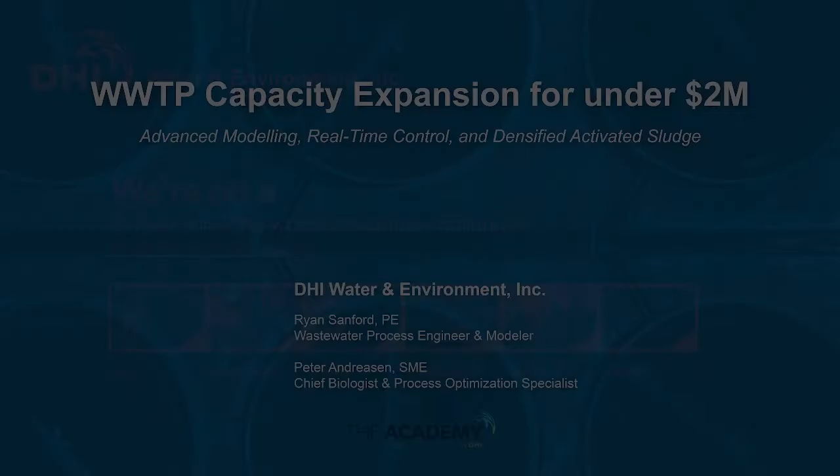My name is Ryan. I'm a process engineer. I work for DHI Water & Environment, Inc. DHI was originally Danish Hydraulic Institute, so it's a hydraulic modeling company for the most part. It's no longer technically an institute, so now I think we're just DHI. But yes, we are on a quest to help solve the world's toughest challenges in water environments. That's why I joined this company actually.

Yeah, there's teams that work in mines and groundwater modeling, oceans and coastline and like wave tidal analysis. Cities, of course, which is what we're talking about today, and then there's a river modeling team, and pretty much every time I talk to somebody in DHI, they're working on some new water environment that I've never even heard of and didn't know it was an issue.

But as we are a hydraulic modeling firm for the most part, there's a whole suite of software that we use. I guess some of it is like the gold standard for hydraulic modeling, and what we're looking at today is our tools for wastewater treatment modeling, so that's West, and Mike Urban, which is a 2D hydraulic modeling platform for collection systems. And we've got DIMS.CORE here as well that we'll talk about towards the end. I think that's enough about DHI. You guys probably want to see something about the project.

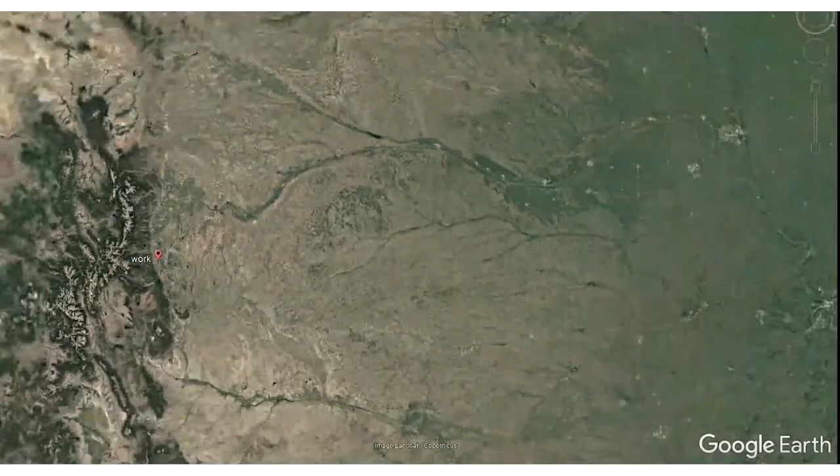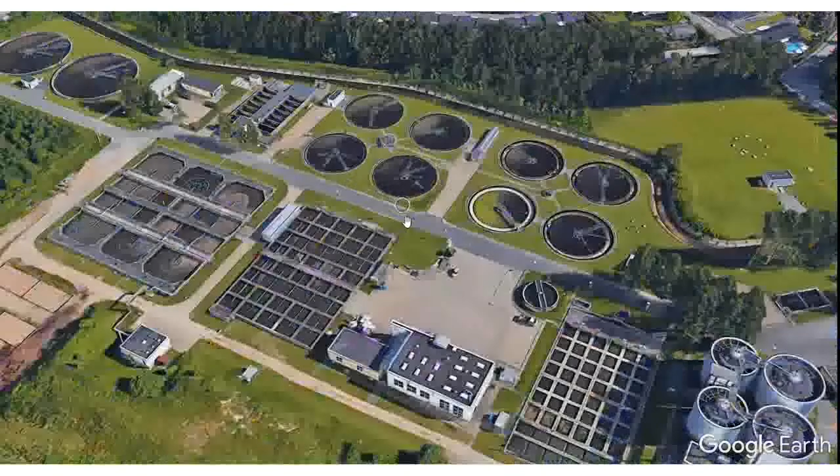Peter, if you want to say a couple words about Aarhus or Denmark and where it is. Yeah, well, Denmark, compared to the US, is quite a small place. We are just 5.6 million or something like that. And the area we go into here is Aarhus, the second largest city, and we are just around 350,000 people, so it's not that much.

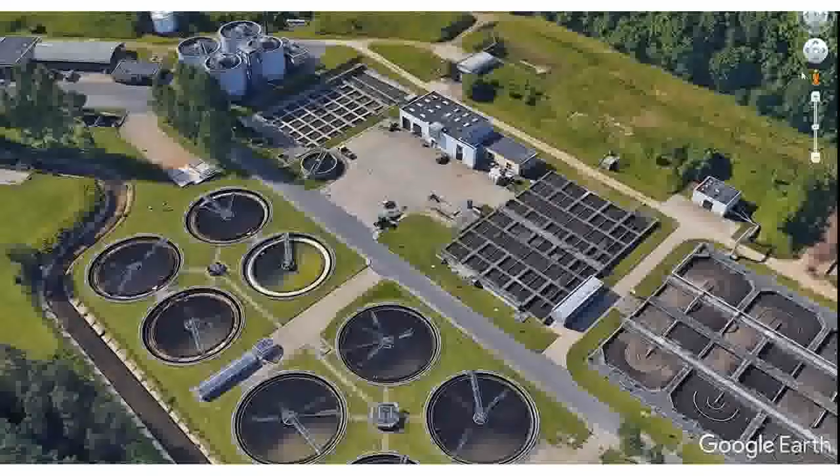Here we are landed in Viby, and what you're looking at here is the wastewater treatment plant that we are going to talk about. It is an activated sludge plant with pre-sedimentation, activated sludge secondary treatment, and tertiary treatment as a filter. Yeah, there we go.

Okay. So we are in Viby, and I'll try to step into the shoes of Aarhus Water because they had a problem. The problem is that they want to extend the plant from 90,000 to 120,000 person equivalent. And doing that is not so easy because they have other plans actually. They would like to build a new big wastewater treatment plant at the harbor side, and therefore building a new extension is something they are not very keen about.

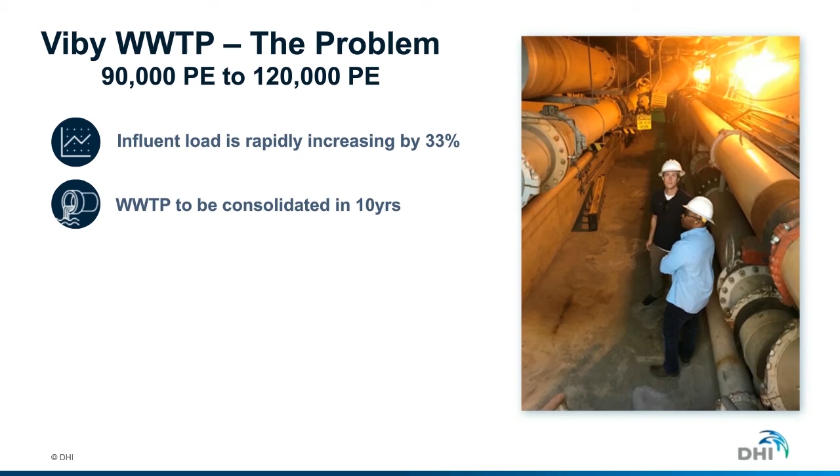So they were thinking: how can we actually increase the load of Viby wastewater treatment plant for just a period of 10 years or so, because then the new wastewater treatment plant will be working and we don't need it anymore. Usually, if we extend a plant, it will last for many years. Many plants have maybe 70 years of lifetime expectancy, but in this case, the extension will just be for a very short while, less than 10 years.

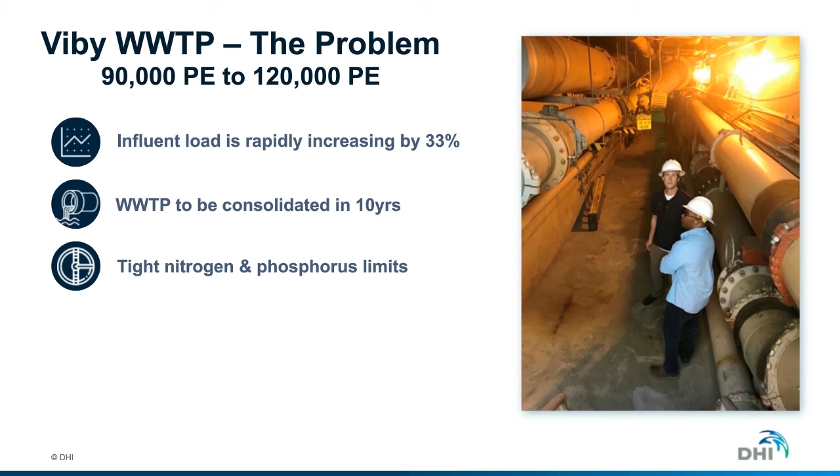So how can we do that with tight nitrogen and phosphorus limits and at a low cost? Because we are not interested in investing in a lot of buildings. Can it be done for a very short amount of money, just $2 million for a 33% extension? And the first thought they had is, we think it's possible. We want to make a tender to see who can actually deliver this for us. So that is the problem we are trying to solve in this project.

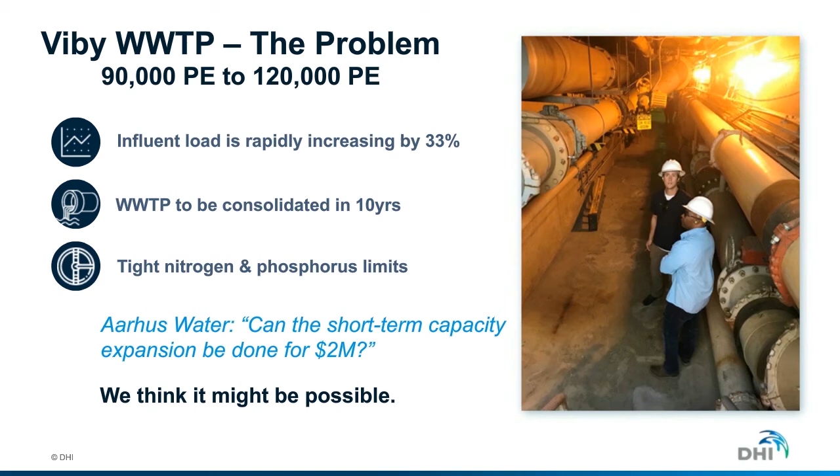And just for reference, Peter, correct me if I'm wrong, the ammonia limit for discharge is 2 milligrams per liter, total nitrogen of 8, and total phosphorus 0.4 milligrams per liter. Yeah, you're right. So it's quite tight limits. And that's pretty standard in Denmark, I guess. The total P is lower than that.

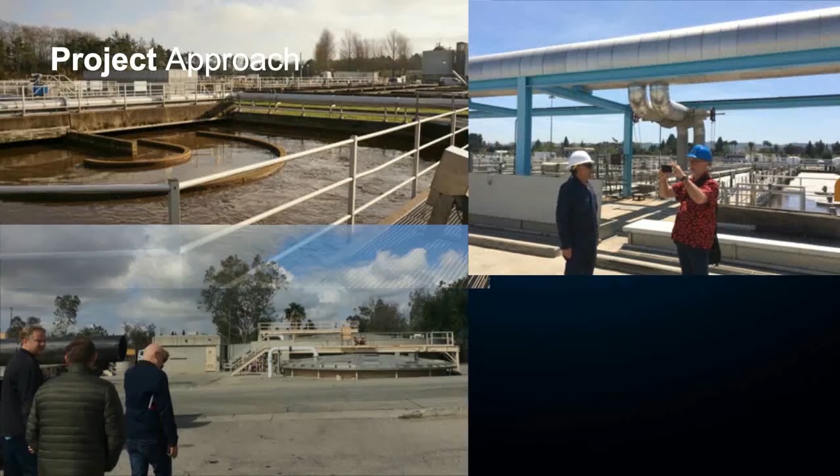But it is also about finding the right consortium to fix that. And actually, the company called Techglass, you see there to the right, is the main company in this situation, delivering and having the contract, which we won actually, but they are the contractor.

And Techglass is a company that is specialized in delivering machine projects mainly. That could be dewatering of sludge, pre-filtering of wastewater instead of primary sedimentation tanks, or effluent filtration and similar things.

And they are quite good at that, and also delivering on time and budget. And furthermore, they are very good at having a close collaboration with customers. So it's a quite effective company. They could not do this themselves, and therefore you can see all the other names around it.

I have to start with Niras, the company at the bottom. That is a big consulting engineering firm that is turning all the ideas into drawings and eventually tenders that can be used for building the whole thing. DHI is the company that comes up with the ideas about, in this case, how the process can actually be turned around in this plant so that we can achieve the increased load.

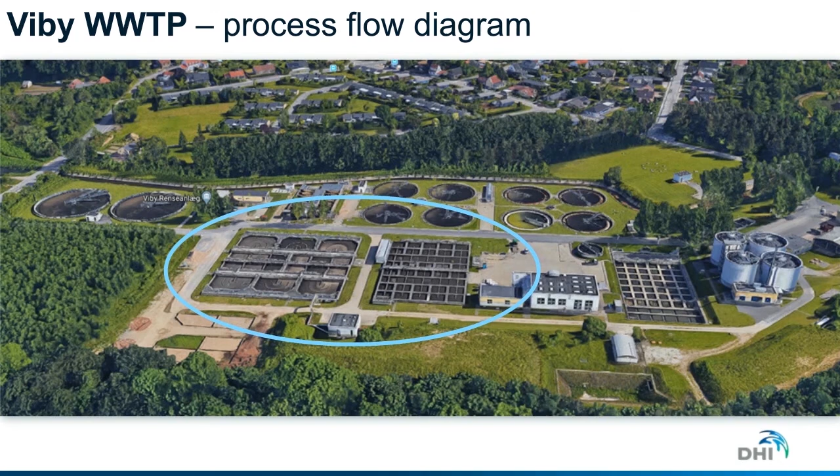This is an overview of the plant, and if you go to the right, you can see digesters. Just a little bit left from the digesters, you can see the sedimentation tank, and the blue area is actually where we would like to do some changes, and that is the activated sludge plant. That is the part that we need to increase the capacity of.

So what we have right now, to the right, is rectangular tanks, and the first one we see there with the yellow marks is a raceway tank where they perform side stream hydrolysis, and that is for their biological phosphorus removal. The water, primary effluent, goes into the next tank combined with the effluent from the side stream,

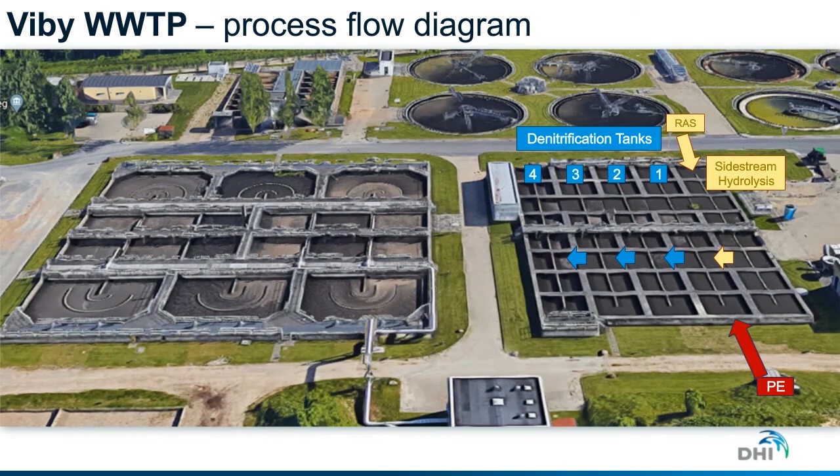and then you have 4 denitrification tanks. The denitrification tanks are getting mixed liquor from the following tanks to the left. The next screen with the nitrification tanks, we can see nitrification tank 1, 2, and 3. There's a potential to step feed between the two and the nitrate recycle back to denit tank 1. And we have the effluent there from tank 3 that goes to the final clarifiers. Some of them you can see at the back.

So that is the setup right now, and we have to do something different to get the capacity of this plant to treat 120,000 instead of 90,000. So if we take the next one.

Yeah, in the next one I talk a little bit about our process, our workflow for a project like this, and we've been doing a lot of these, especially, you know, I've got the chance to work with Peter, who's an absolute expert on this.

He can take one look at a plant and come up with 10 ideas immediately, and it's so much fun to work with him. He's like a hype man when you get him into a wastewater plant. It's perfect.

But yeah, we start with a plant process review, where, oh man, lost my notes. Where we usually spend a lot of time on site working with the operators, trying to see how the plant is actually operated, what kind of bottlenecks are there, can you get flow from tank A to tank B, and if you do, are you able to aerate it a certain amount. Really, what are the capabilities and bottlenecks, what are the targets, what kind of projects have been done, because these things usually don't run exactly as they were designed 50 years ago, because there's been a lot of projects between now and then.

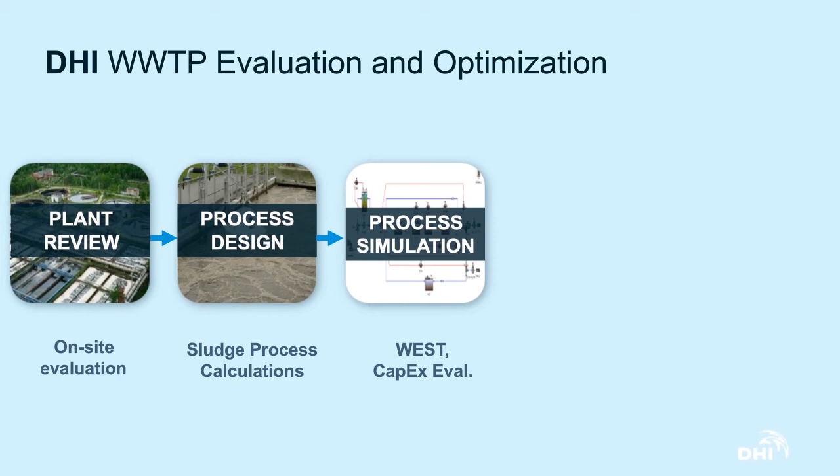And that's in partnership. Can I just put in, in this case, Aarhus then? Yeah, go ahead. I would just say this is actually a prime place to go in, because here the consortium has to find out, is it actually possible to do the project for 2 million? So that is an essential place the consortium had to go into. So now the consulting engineer, together with Techglass and so forth, evaluated, okay, we think it's possible to deliver something like this for 2 million.

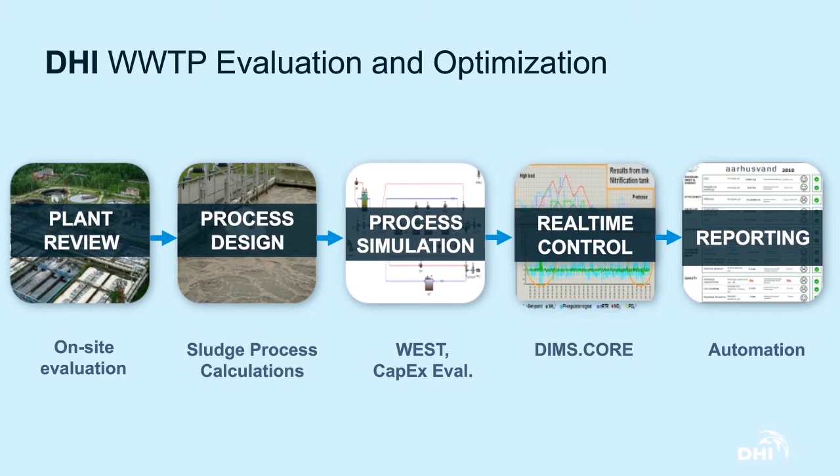Yeah, and at that time, the engineer and whoever would go ahead and install any new equipment that's required, if there's a new sensor or new diffusers, baffle walls, stuff like that. And then we use our DIMS core software to control that new system and implement the controls that we tested in West. And then the final step is taking advantage of the DIMS data management software, and you can set up things like automated reporting and try to automate some monitoring workflows that maybe already exist in our manual operation. So that's our cycle that we followed for this project, and what we'll focus on a little bit is the West modeling that was done here.

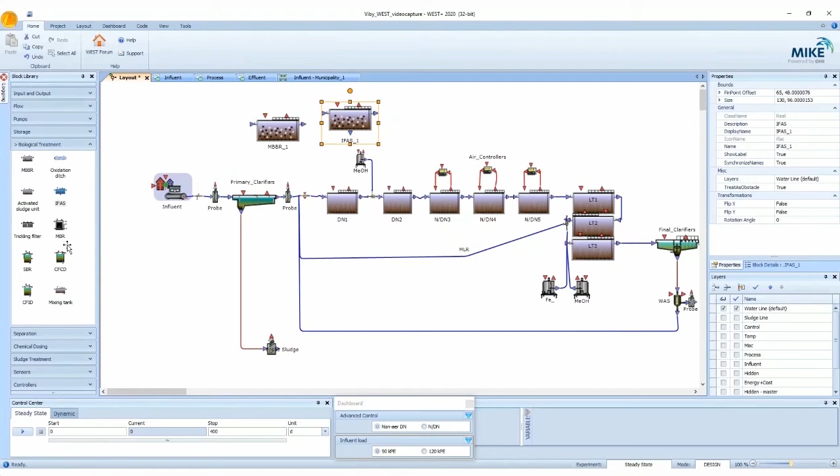So I took a screenshot of a video of me running the model and giving us a little bit of a tour of West, a super fast one. So this is our baseline layout, and you're seeing the West graphical user interface. This is how the plant looks that we're testing. You can add new blocks: membrane moving bed bioreactor, an IFAS system, sand filter, secondary clarifier, and connect them with these hydraulic and model connectors. So you select the outlet stream and the inlet stream for the next one.

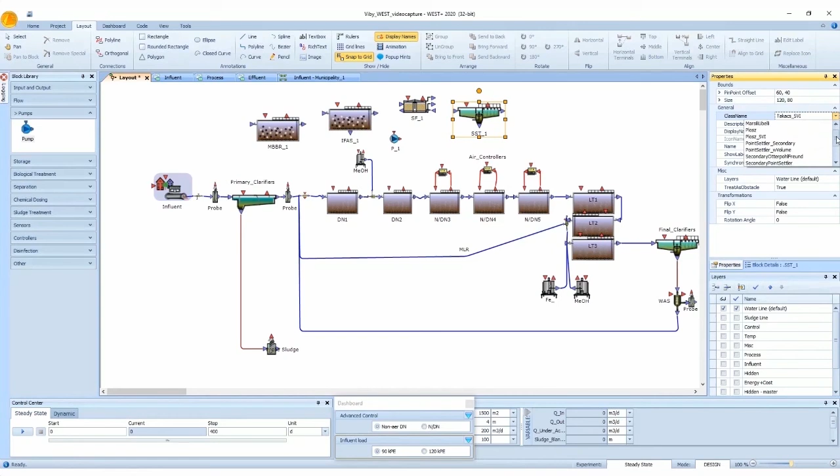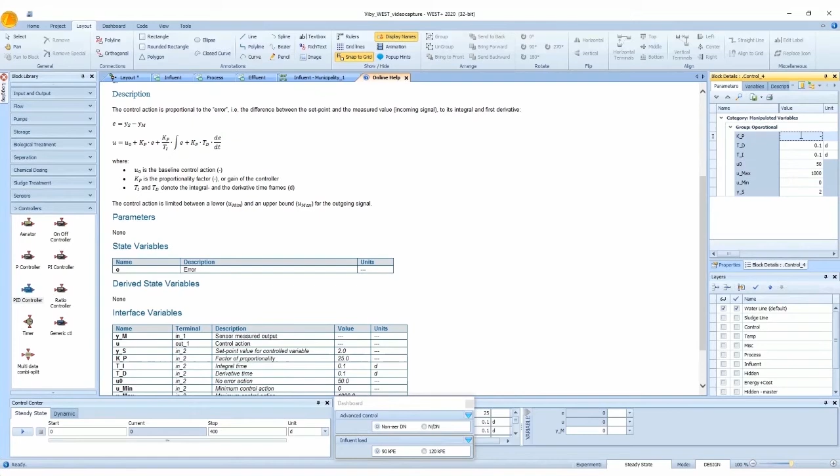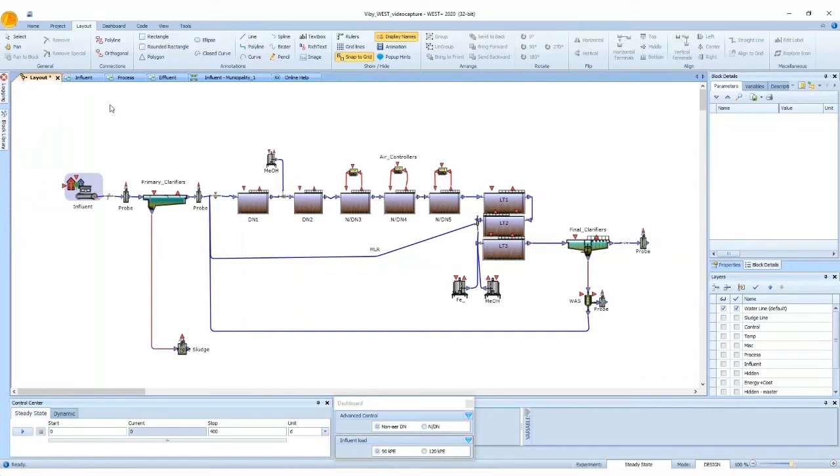And then for each model block, you can select the actual type of model to be used. For this particular settler, I've selected the Takács model set, but there's a handful in there that you could choose from. One of the main advantages is this controller that you can use. This one's a PID, but there's a handful of controllers, and you can connect them really in any way you like. And you can open this help window to find out how to set up or tune the controller and what the different parameters mean. But the main thing I wanted to show is that you can open the model editor here, which we've done for this project in particular.

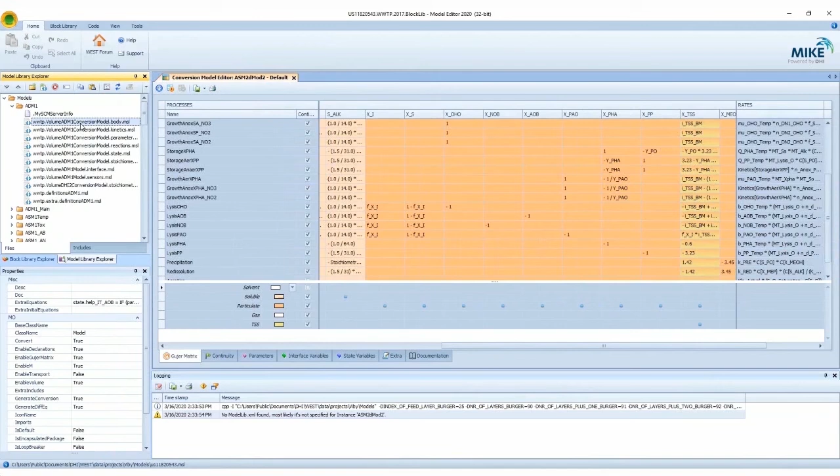So I have a custom model library now. And you can modify the base components of these models. So you can look into the Gujer matrix and change. And none of these things are locked for editing, is what I'm trying to show. So you can play around with the different kinetic expressions or constants, and then look into the model.

This one's an anaerobic digester if you needed to see how it worked, or if you wanted to change some aspect of, say, last year we were working on the pH balance in one of those for a while. So yeah, it's completely open. You can go in there, you can open the controller module, for example, and customize how the controller will interact with the model, or the activated sludge models.

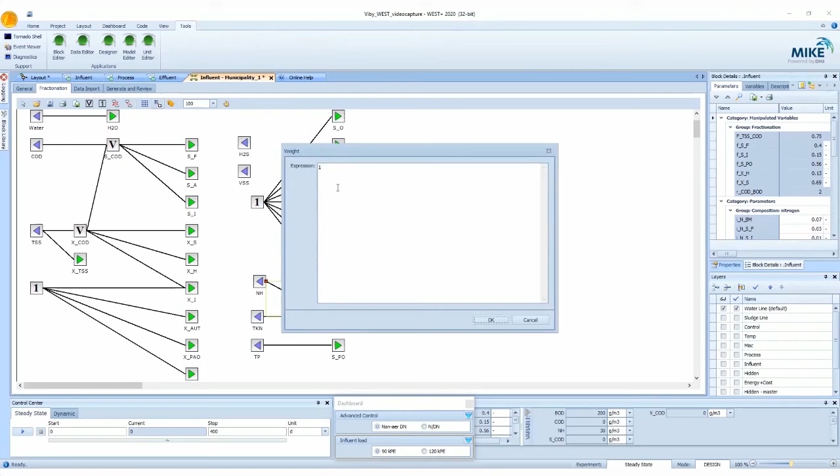Here's just an example of making an influent file. Maybe you wanted to add H2S, VSS, or ammonia data. You can do that in here and fractionate those influent data into stoichiometrically significant figures for WEST to use. So that's the tour. Now, oh yeah, one more aspect of the tour. You can run some of these advanced experiments, including Monte Carlo uncertainty analysis, and get a better idea of how uncertainty affects the model, which is pretty critical in any modeling activity.

So now we're running. I just started the model, so right now it's set at 90,000 people equivalent, and these are some dashboards that we set up so we can see how our model's running, I guess in real time is the word, and we also added this widget where we can change the flow from 90,000 people to 120,000 people equivalents. We're talking people equivalents mostly because there's a big industry associated with this plant. So we end up with a lot of BOD and nitrogen coming from that industry when it's being introduced.

So I think just from running the baseline model, we were seeing that it's pretty unlikely that the plant could handle that total nitrogen load. So what we did is added this control system where I can hit this button and push a new parameter set in and unlock this control set that Peter and our expert modeler Enrico built, and run the same influent file.

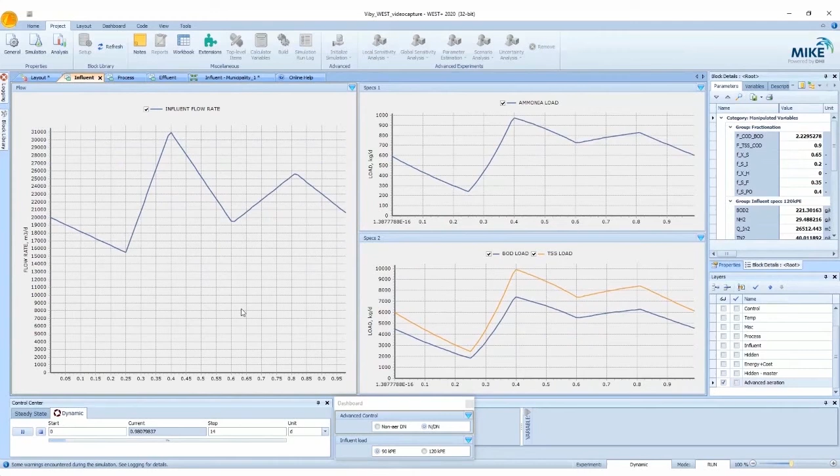So right now we're running with 90,000, and once we get up to day 7 or so, we'll do the same thing where we bump the flow up by 33% right here, and you can see the before and after effects on each of these charts. Yeah, and just from running the same setup but adding some online control system. I mean, they already had some online control, but we'll talk more about the controller in a bit, but we can see that there is some space to improve the operation.

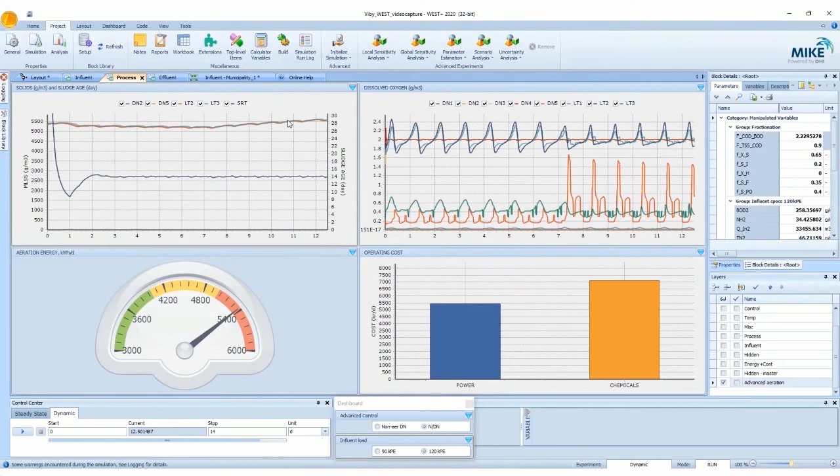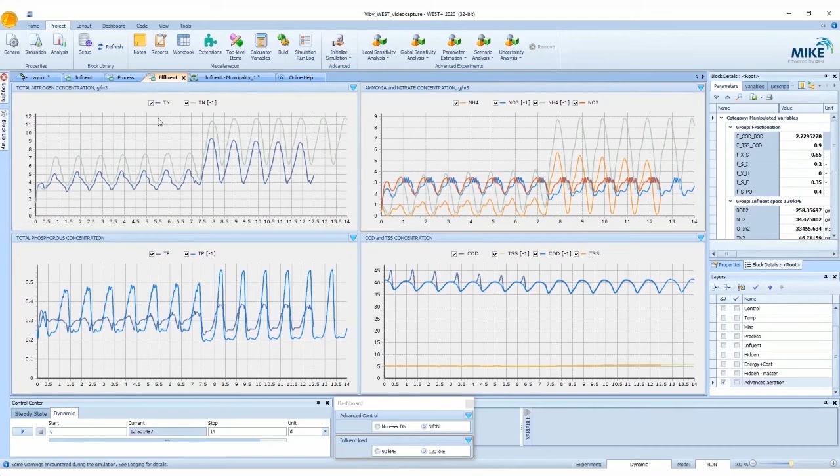You can also see here that we didn't quite reach a steady state, so in practice you would probably run a steady state simulation in between. As we continue towards steady state, we're actually getting more nitrification, which looks good. But yeah, the main idea was that we were able to get better treatment in that same system in a virtual modeling environment, but with increasing the resolution and the amount of changes that we're able to make.

Does it make sense, Peter? Anything to add?

No, what I think is important now is to show the different layouts that we are trying. You said that there's some more controllers, but what we also did was to add some more aeration, and I think you're going to show that later on. But as you probably remember, we had a lot of DN tanks to the right, and we are actually turning some of these DN tanks into aeration tanks, and by that actually increasing the aerobic volume that is needed for nitrification, especially in the winter time. So that is also what we did in this case.

Yeah, we'll get there. One other thing that I wanted to show is that we tested the difference here between keeping that first tank as side stream hydrolysis and activating some BioP versus taking that tank and just adding it to the nitrification, denitrification, specifically denite capacity for the plant.

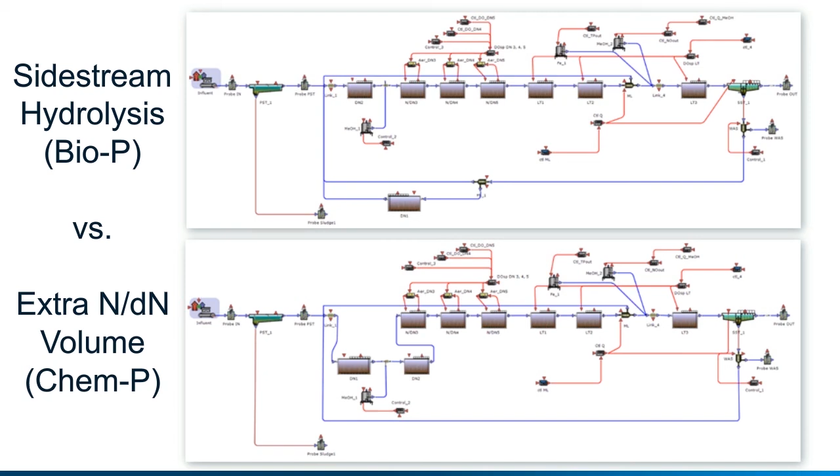And then we were better able to control, at least virtually, aeration and ammonia peaks as peak loads come into the plant. It was a lot easier to control the effect that has on effluent. So we combined all these things into a full solution for the plant.

The first thing was actually, by also doing all this simulation, we could see that we definitely needed some more aerated volume. And that was to ensure that we could have nitrification, especially during the winter time with low temperature. We have temperatures down to 10 degrees in Viby in the winter time, but also to take peaks of ammonia coming in. So I think if you continue.

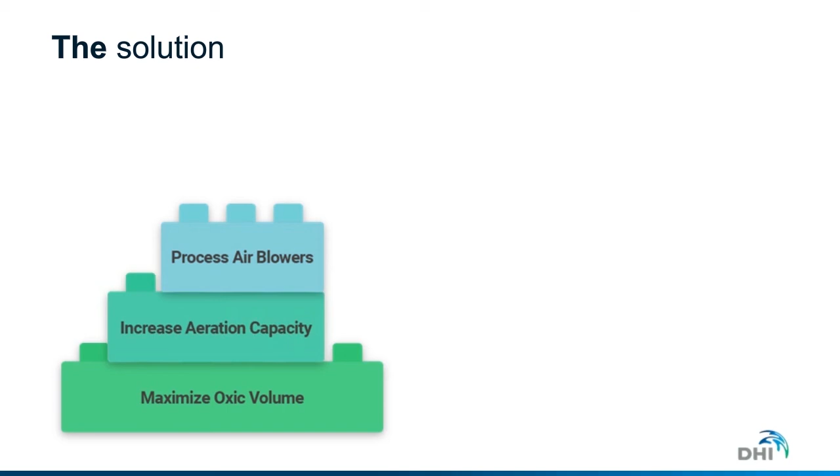Nice. Yeah, well, as you said, we started out with the realization that we needed more oxic or more aerated volume. And to do that, we knew we would need more aeration capacity. So Peter and the team designed a modification to the process air blowers that exist, and modified the diffuser grids at the plant so that they can better control aeration in different zones. We'll show you what that looks like.

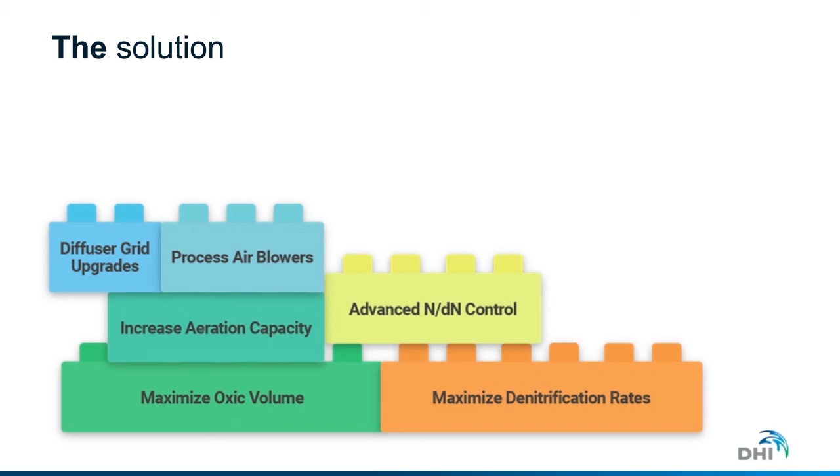And we're also going to need to increase the denitrification rate, or find a way to optimize it. That's done with our advanced DN or NDN controller. Yeah, the reason for that is that we actually now removed some of the denitrification volume because we introduced aeration. So the denitrification with normal wastewater isn't sufficient. We need to increase the rate, and therefore we add some external carbon with a higher denitrification rate.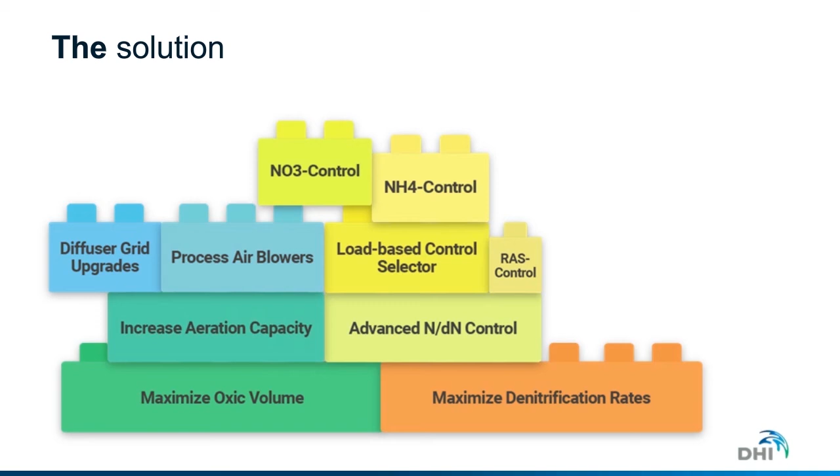Exactly, and you guys also included this load-based control selector. So there's multiple control modes, and those are automatically selected based on the incoming TKN load. And there's also a return sludge controller that was already part of this plant. Then there's ammonia-based aeration control as part of the solution, and there's also this nitrate controller, and all of these cascade to a carbon dosing control mechanism. And again, we'll show you some curves and look at how that actually works in practice.

And the last part of the project was during peak flows. We're right on the cusp of straining the secondary clarifiers. So to provide a little bit of safety in that process, we looked into granular activated sludge, or maybe we should call it densified activated sludge. We didn't quite make granules here, but probably don't need them. Installed some hydrocyclones and ended up with significantly better SVI and settling velocity. So it's an increase in clarifier capacity without adding clarifiers.

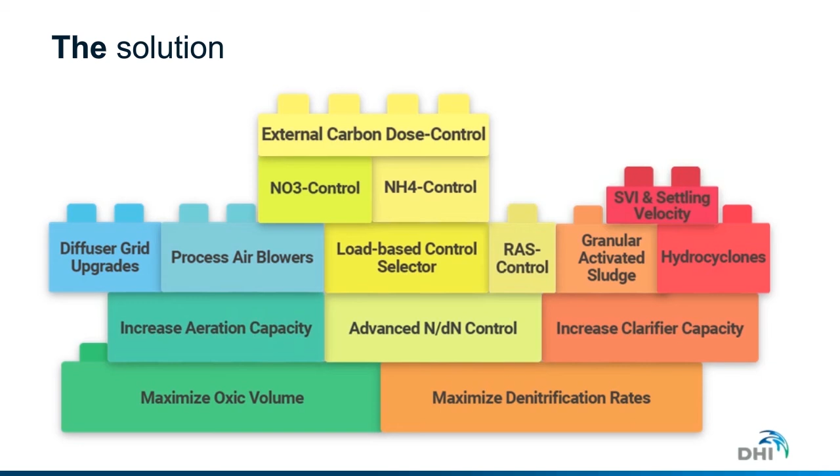Yeah, that is also because we have to increase the sludge concentration of the activated sludge. And when you do that, the settling velocity goes down if you have more sludge. And therefore the hydrocyclone system can help us to ensure that we can settle all this sludge.

Exactly. And just a little comment from my side. Lego is pretty squared and one fits all, but I think it's important to say that it's a customized solution that you build to the wastewater plant. So it's customized to the concrete that's on the plant and the sort of problems that the plant is facing. Is that correct? Yeah, exactly. These Legos are put together pretty specifically for this solution, and they will be rearranged for every plant.

It's not a one size fits all, and the Danes really do love Legos. They're a proud race, and it's a Danish company, and they just have Legos everywhere if you ever go visit.

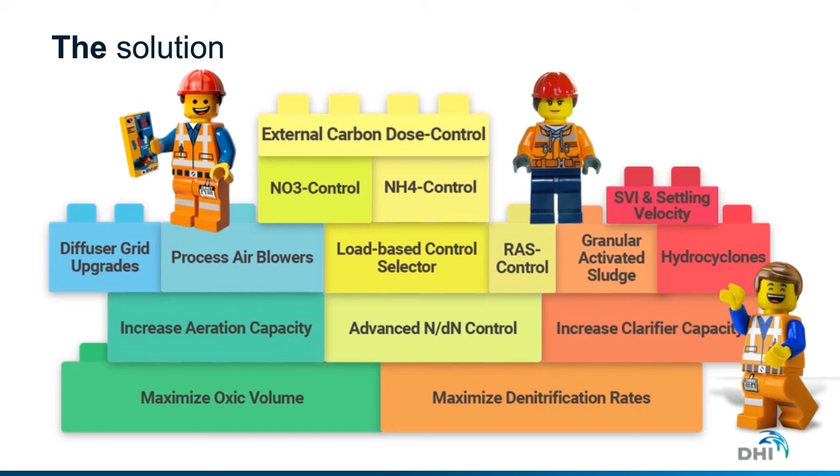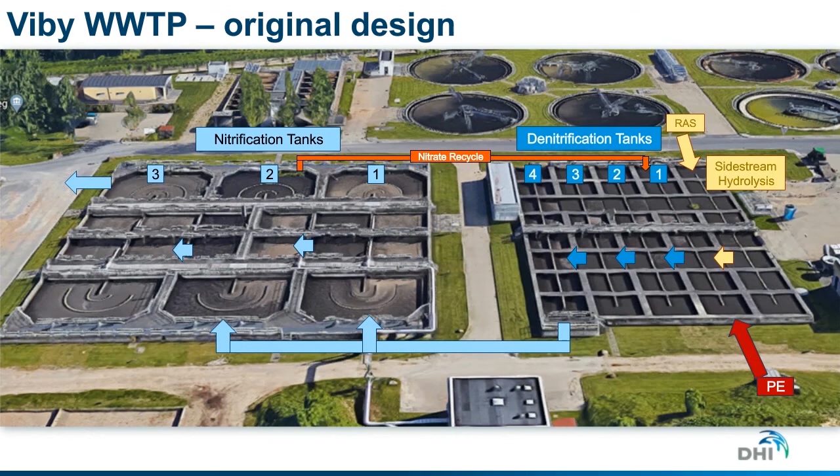Okay, Peter. So now I release you. Introduce the solution. Yeah, this is before. So if you just continue: before, we had to the right the side stream hydrolysis tank. It is now turned into a denitrification tank.

So the primary effluent goes over there, and then tanks 3, 4, and 5 there in yellow are now not denitrification tanks, but NDN tanks, meaning that we can turn aeration on and off if we need it due to ammonia peaks or because the temperature is lowered, so we need more oxic volume. And the flow from those tanks still goes into the tanks you see in the raceway to the left.

Tanks 1 and 2 are strictly nitrification, but now tank 3 to the left is turning into a post-denitrification tank. Before it was also doing some denitrification, but now we are adding carbon for denitrification to this tank to increase the denitrification rate and to remove the nitrate so that we can comply with the total nitrogen.

And still in that tank, we have the possibility of aerating if the ammonia is getting too high. So the main process in tank 3 is now post-denitrification, and before it was nitrification. So this is a new setup. That's before, in the end tanks. And that's after. You notice there's also a blower building.

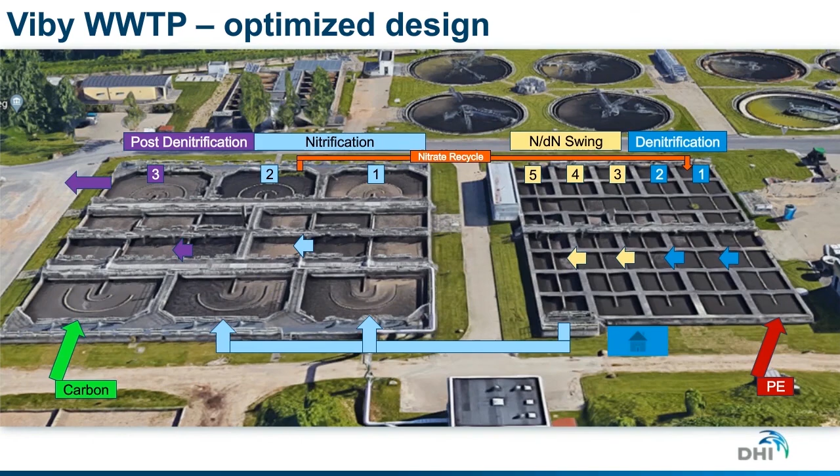There's a need for controllers to do this. As you remember, all the different Lego blocks need to be controlled. Ammonia is one of the things we really need to look for. If the ammonia coming to the plant is high, then we need to start aeration, or else we cannot keep the ammonia peak down in the effluent. And in the post-denitrification tank, we need to look for nitrate, and if the nitrate is getting too high, we start dosing and increasing the denitrification rate.

Then we have the recycling of sludge to the DN tank, and that is also controlled. And furthermore, there is a return sludge control that is flux-based, which is already implemented at the plant. So there's a lot of controllers. So it's maybe simple to control any one aspect of a plant, a PID feedback control loop maybe, but when you're controlling all of them at the same time,

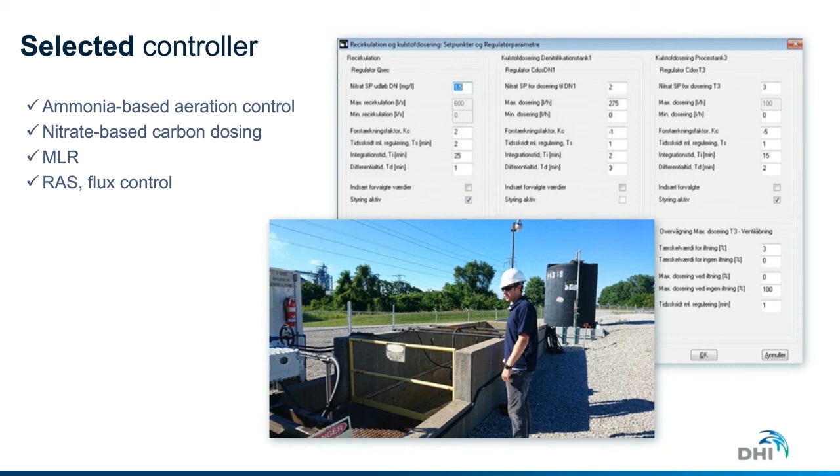What I would like to say here is that Aarhus Water is doing this themselves because they're very good at automation, and DIMS core is something they use for making their controllers. So they're very capable of doing something like this. So it's also a collaboration between what we would like to see from the model and what they actually implemented. I think we can step forward.

This is just how it looks, a screenshot of the operator's layout. In a way, it's not so important, but it is possible here to click on different things, and you get curves up, and you can see all the different values, ammonia, nitrate, whatever, at different places at the plant. There's a lot of sensors involved, and they are used for the different controllers needed. That is the main message from this one. I don't know how many sensors are involved, but a lot.

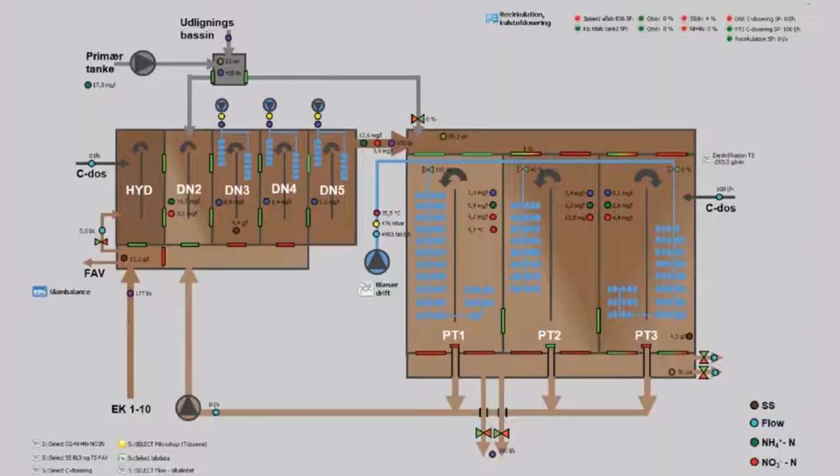Yeah, I can unpack that a little bit. We're looking at the ammonia loads from all different parts of the plant. So that includes return from, what do we have here, a decanting process. There's the DEMON, which is an anammox process that's recycling to the front end of the plant, and then of course some influent ammonia.

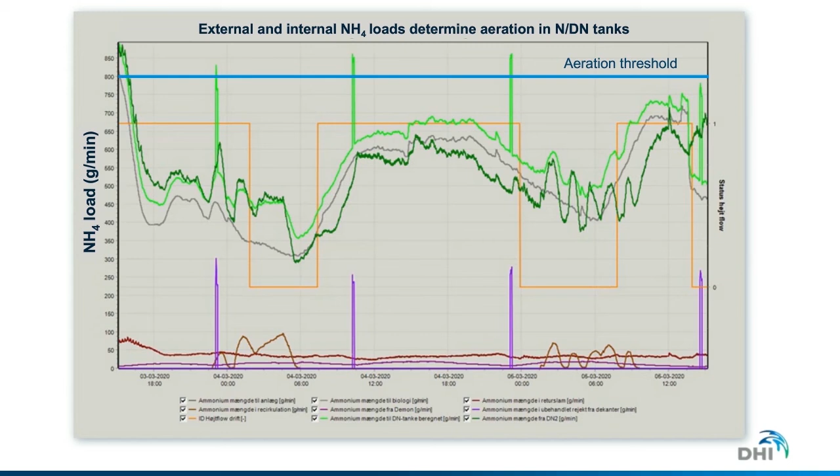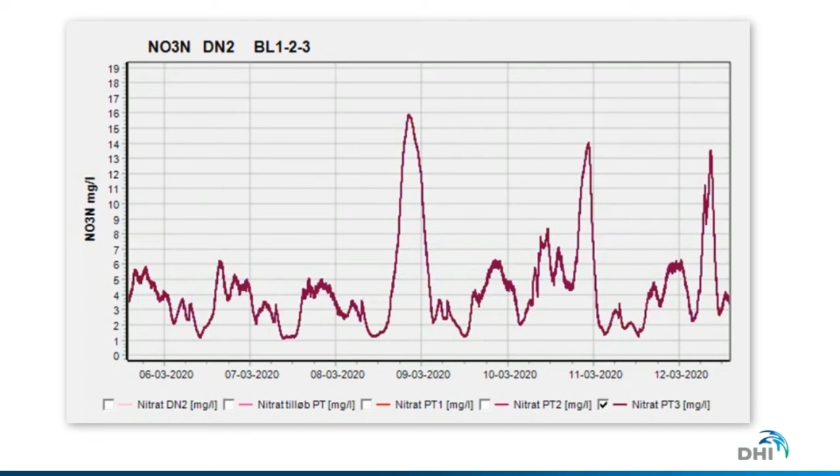Okay, and then I've just got a few slides here that show the controller working. This is nitrate in that final denitrification tank, the post-denitrification tank. You can see it's off spec at one point here. There's really high nitrate, and if we show the ammonia curve in the same process tank at the same time, we're getting above 3, and there's a trigger at some point to go ahead and start

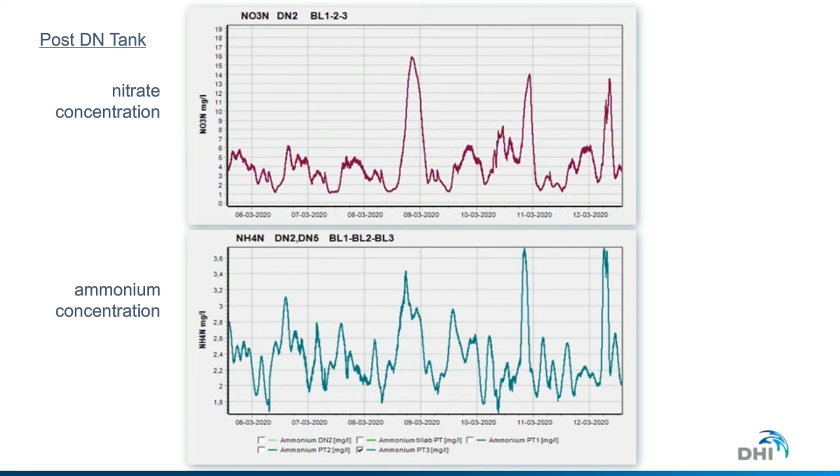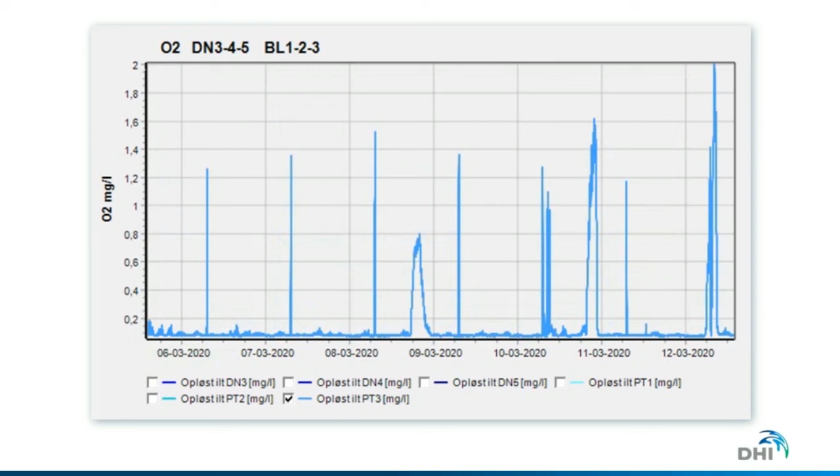aerating that tank. This is DO, and at the same time you see right there above 3.4, the DO spikes up to 0.8, and I think the threshold is like 0.3 or something. And once you hit 0.3, there's a slightly different x-axis, so the time frame's a little bit different. But nitrate's in red at the top.

Whenever nitrate is above this pink flat line in the middle, 3, in that tank, we want to be dosing carbon to help supplement the denitrification capacity of that tank. But there's one instance here where you see the bottom blue line, that's DO, measured DO in that same tank. Once DO gets above like 0.3, or actually maybe it's just an aeration trigger, the carbon dosing will kick off.

And that's to make sure that we're not just taking up the carbon that's being dosed through heterotrophic carbon oxidation. It would just be wasted. It wouldn't be used for denitrification. It would just be taken up. So that's one other aspect of the controller, where it'll actually kick off the dosing if you're below 3 milligrams per liter nitrate, and also if you're aerating in that tank.

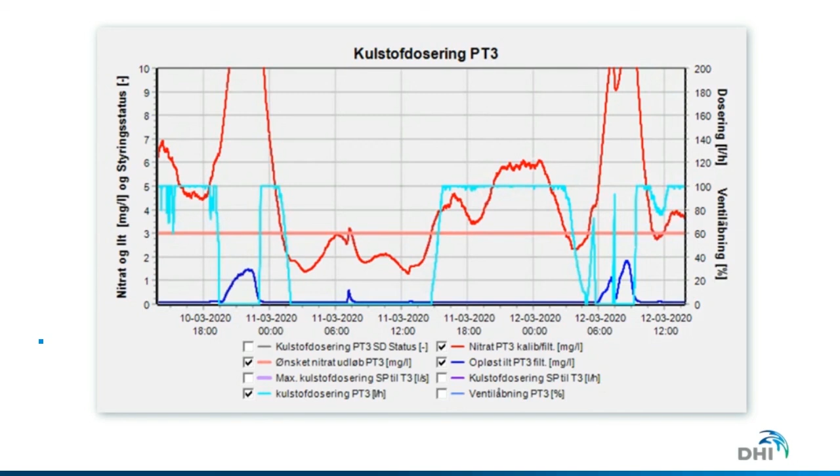So one thing we can see after we changed is that there is more control of the effluent, and we don't see ammonia peaks bleeding through. That is important. Again, also, if you look at the nitrate, I think it's probably too much to go into all these details about the nitrate, but what is important here?

I think the dark line in the middle on top is effluent, or not effluent, but tank 3 going out, and if you look at the very dark color, obviously there's more flow in the same period, and the effluent nitrate is actually lower, and effluent ammonia is either lower or comparable. No, the lower one is 19, so it's lower. Yeah, even though there's a lot more flow, we can still have a lower ammonia. So both nitrate and ammonia are lower.

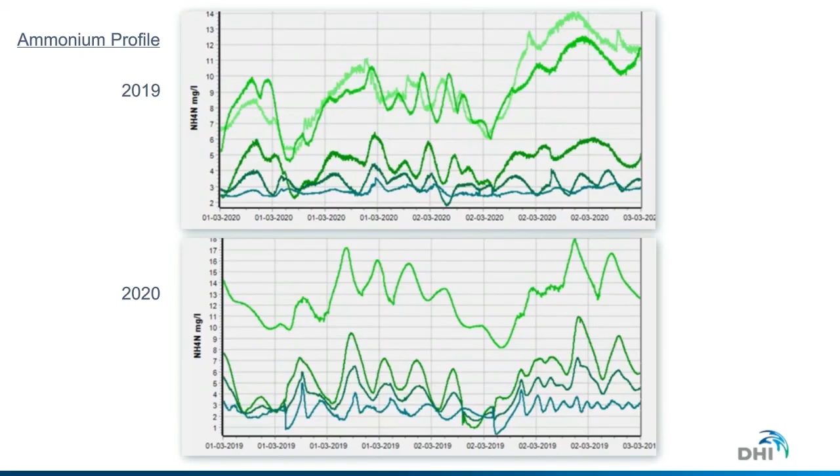Yeah, it's not essential. It can actually be used for 1 MGD or 30 or 100 MGD. It's not necessary to have a specific size for this. All equations and so forth can be calculated for whatever volume and flow needed.

But you can see at least here we have a peak load of about 30 mgd. This is settling, and the hydrocyclones, as we talked about, should have the ability to make the sludge settle a little bit better. And if you look to the right, you have a hydrocyclone system where the sludge settles in the column there. It's called BB1, to the right there, and it has a significantly higher clear water than the water column to the left. And that indicates that the sludge is settling better, at least in this picture.

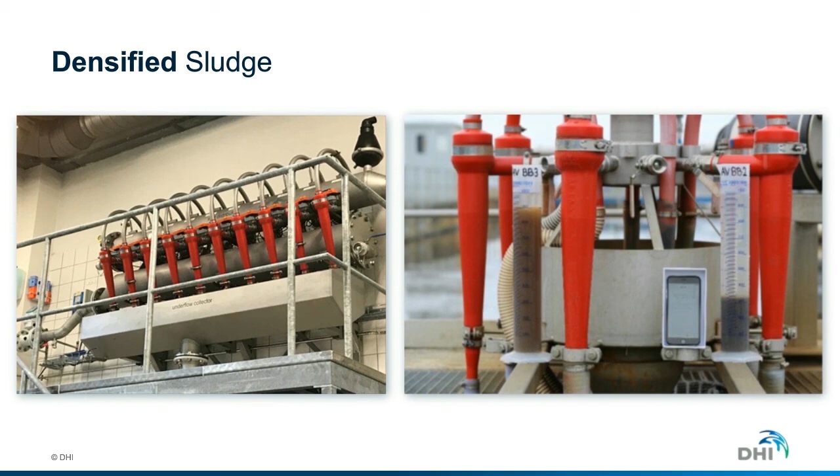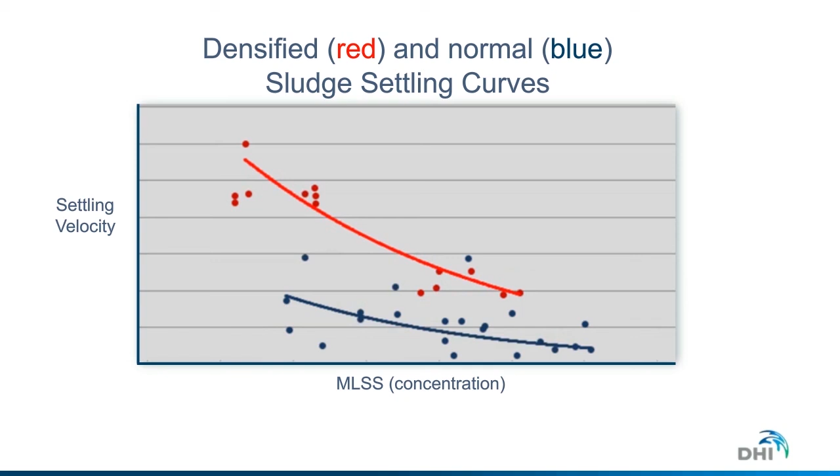So we are in the right direction. We wanted to have more safety in the settling, in the clarifiers, and it was achieved also. And we have hidden the axes because this is data that's owned by the plant and the other teammates right now.

Yeah, we did see an uptick in denitrification rate, and I know this was one of the questions. And we did expect to see better denitrification rate, and our theory at least is that due to the targeted carbon dosing, we're able to concentrate the population of denitrifiers and retain that population throughout the diurnal patterns in the day without having to rebuild that as nitrate is made available.

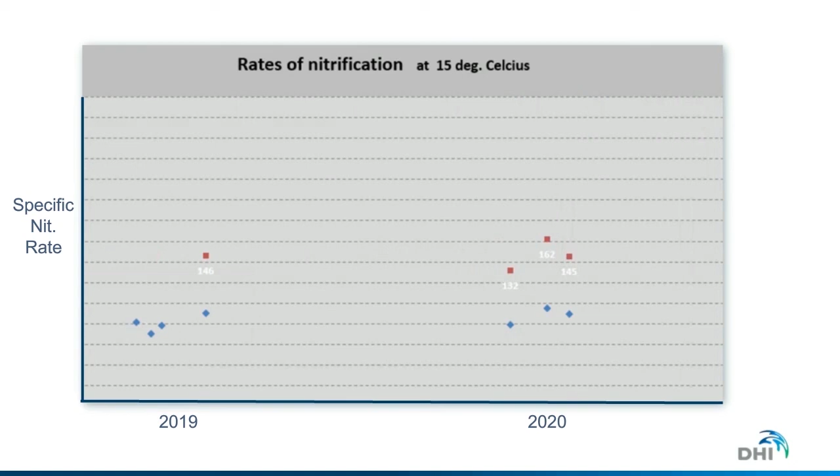But we didn't see the same effect with nitrification. Peter, maybe you can unpack this. Yeah, there's no change, there's no increase in nitrification rate, but we saw it for the denitrification probably because of the addition of the carbon making the population of denitrifiers increase. Yeah. I guess we didn't necessarily expect any, but it's something to track whenever you're trying to densify sludge.

Just a quick word on DIMS.CORE, I guess. You can connect directly to SCADA, so this thing can operate in parallel to SCADA, and the operator always has the ability to shut it down and revert back to either DO control or some kind of fallback control, and that'll also automatically happen if any connection is lost. The control system validates data as it comes in and decides whether or not to use it for control. If we don't like it, it'll also shut down the controller, flag that data point, and then we can look into the sensor. Just an example of an automated report.

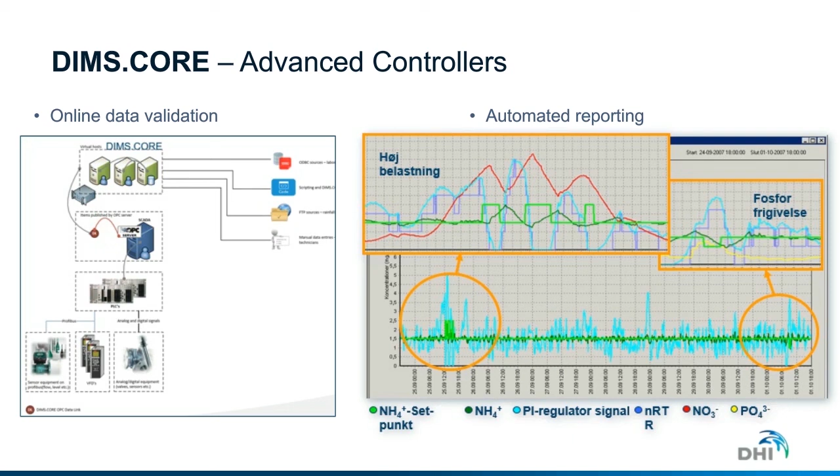And yeah, this is kind of the first stage of a digital twin. What you can do is take these data that are being pulled into DIMS and used for control, and also export those to a WEST model and run that model in an online environment, and ultimately use that to output control setpoints back to the plant, or maybe to select a control mode, or just to send some recommendations back to the plant, and then the operators get the chance to review it, or use it to calibrate sensor data.

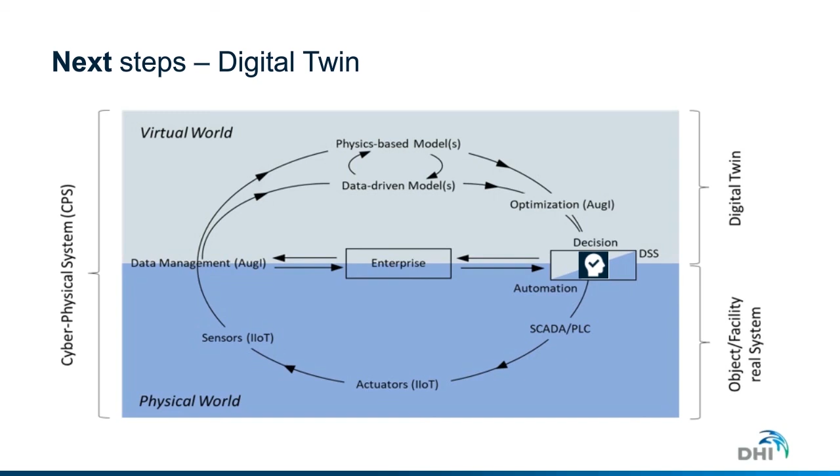I guess there's a slew of things that we can do with an online model, but this is something that DHI has been working on quite a lot. Actually, we built one in China and one in Denmark, and we'll be excited to bring this to market in the States. And so, last thing is... yeah, go ahead.

No, we can do a lot of things, but I think what is really important is the question that Aarhus Water had: is it really possible to build this plant extension for a very low amount of money, probably 1/10 of what is necessary? And it was actually possible to do. And we had to go through a lot of details to do this, as we tried to show you. And maybe it's a very big mouthful to show here. But anyway, it is something that can be evaluated on many plants.

And it is not the only plant where we have found these possibilities of actually making an extension to significantly reduce cost. We have done it in Portugal also, and we have also looked at it in the US as a peer review of projects. So it is not a one-off; it is possible to actually make something cheaper, like we've shown here. As I said, probably 1/10 of what a normal extension should have cost.